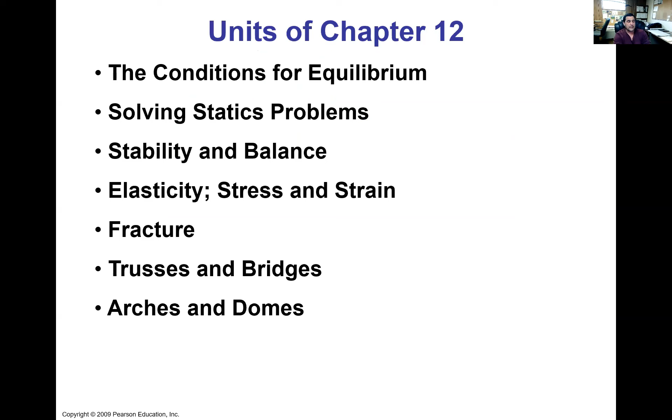So we're going to talk about what the conditions for equilibrium are. We're going to do some problem solving with statics. Then we're going to talk about stability and balance, elasticity, stress and strain, fracture, and the last two sections on trusses and bridges and arches and domes, I'm going to gloss over pretty quickly. If you're going to be taking an engineering degree, I'd recommend looking it over, but it's not going to be on the test.

So what are the conditions for equilibrium? For something not to move, the first condition of equilibrium is that your sum of forces in the x direction, the y direction, and the z direction - the sum of all the forces needs to be zero. So an object with forces acting on it, but with zero net force, is said to be in equilibrium.

So a book sitting on a desk is exerting its weight on the desk, but the equal and opposite force to that is the normal force.

Let's do an example here. One of the things we're going to talk about as we go with these problems is reaction forces. We're not really looking at, in this example, the reaction force of the cord at the wall, but we will get into that in a little bit.

So what we're looking at here is the tensions in these cords. They want us to calculate the tension in cord A and cord B, so they're calling it FA for force A and FB for force B, that are connected to the vertical cord supporting a 200 kilogram chandelier. So now kilograms of mass, okay? We're also going to ignore the mass of these cords. They've already converted this 200 kilogram force for us into 1,960 newtons. They've also given us a picture here about the X and Y components of this - opposite interior angles, this angle is 60 degrees. You can also say this angle is 30 degrees for us to determine whether we're dealing with sine or cosine.

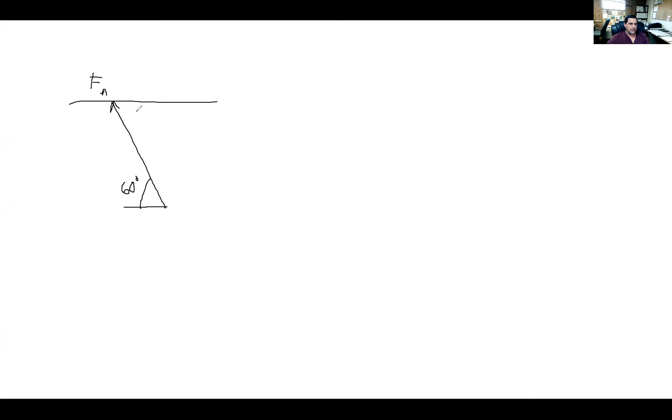You have this FA, and this angle here was the 60 degrees. In the picture, here was the ceiling and the 60 degrees was here, but same sort of thing. This FA - I want you to get into the habit of whenever you see a force that is not parallel to either the X or Y or Z, depending upon how many dimensions we're given, I want you to get into the habit of breaking this into an FAY component and an FAX component. So get in the habit of breaking these forces down.

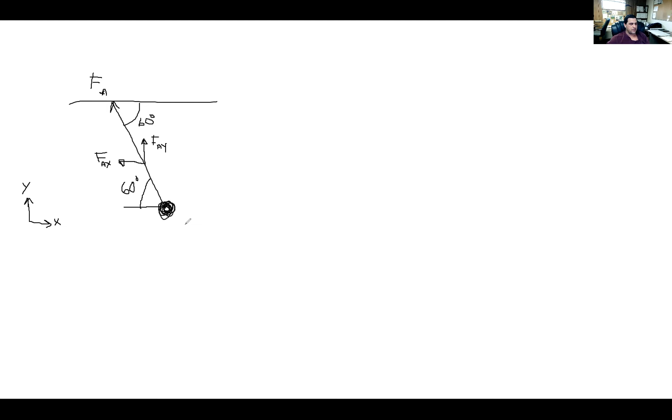Okay, so I'm not feeling artistic tonight. I'm just going to draw a big circle here and say this is my chandelier. And weight is equal to mass times gravity. We're given a mass of 200 kilograms. If you take your 200 kilograms and multiply it by 9.8, so here's your mass, the weight of this chandelier is 1,960 newtons.

But then we also have this FB, but FB is just in the X direction - there is no Y component to it. So it doesn't matter what order you work in. You can sum forces in the X first, or you can sum forces in the Y.

If you have too many unknowns, try and solve for the other one. So previously what we did was sum of forces is equal to mass times acceleration. But we don't want anything to move in statics, so your sum of forces is going to be equal to 0. So I'm going to do the Y direction first.

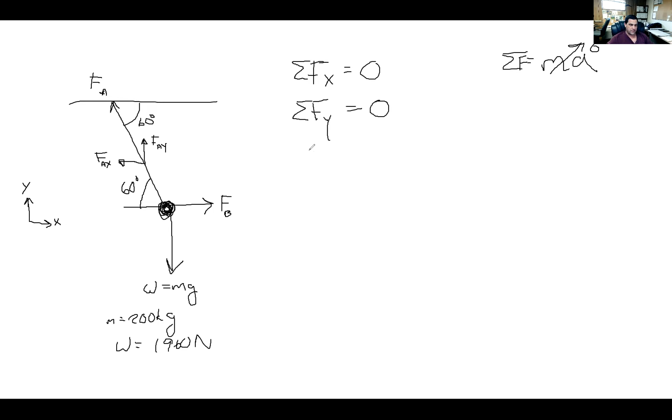And I'm going to break this FA force into its Y component. So its Y component would be the sine of the angle that we're given. So it would be FA times sine of 60 degrees. And as you can see, that's positive. So keep track of your signs.

Minus the weight of the chandelier, either the 200 kilograms times gravity, or 1960 newtons, is equal to 0.

And I've got my free body diagram here. Always get in the habit of drawing your free body diagram. You're accounting for all the forces acting on an object. On a test, I'm going to give you some sort of points if you at least give me a free body diagram.

So if we want to solve for FA, FA is 1960 newtons divided by sine of 60 degrees. So FA is equal to 2,260 newtons.

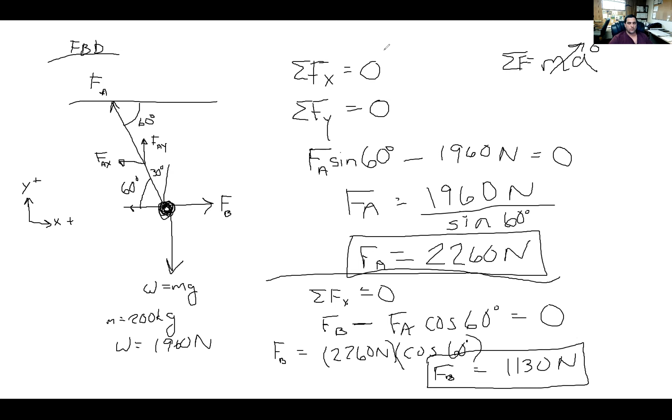So if you end up with too many unknowns, switch to the other direction and see if you can solve it that way. Okay? I'm going to stop sharing this. I'm going to go back over to PowerPoint. So we just solved for those two tensions in those two cords.

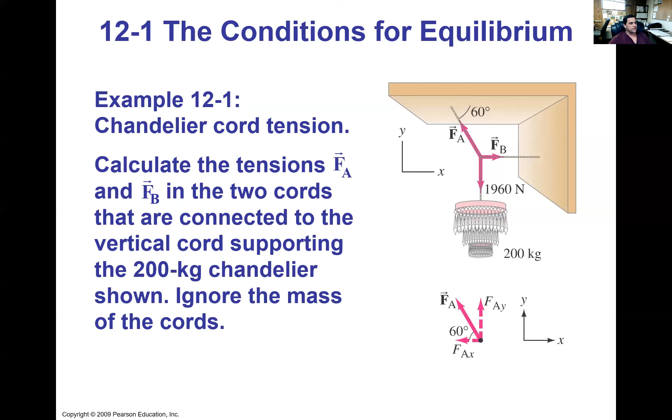The second condition for equilibrium has to do with the subject we started talking about in the last chapter, and that is torques. Now, when you get to statics, a lot of statics texts will refer to torques as moments. This text continues to refer to them as torques. So the second condition of equilibrium is that there can be no torque about any axis. Whatever axis that is can be completely arbitrary. So the sum of torques has to be equal to 0. There can't be any rotation for this either. So sum of torques has to be equal to 0 also.

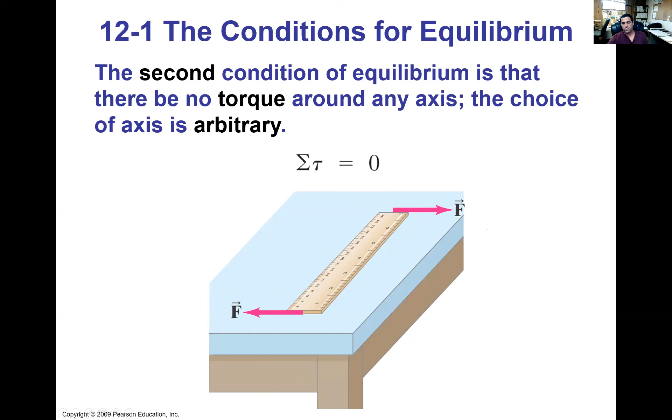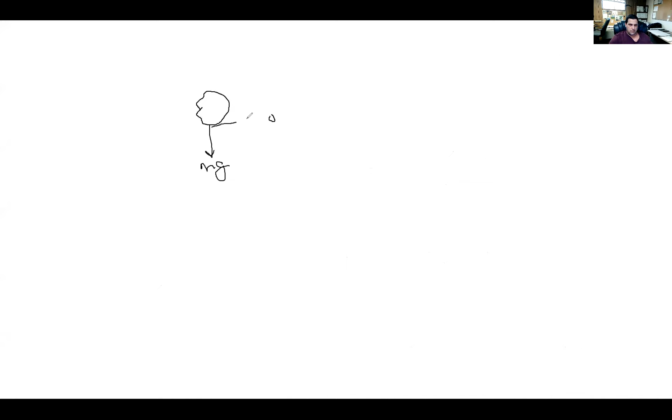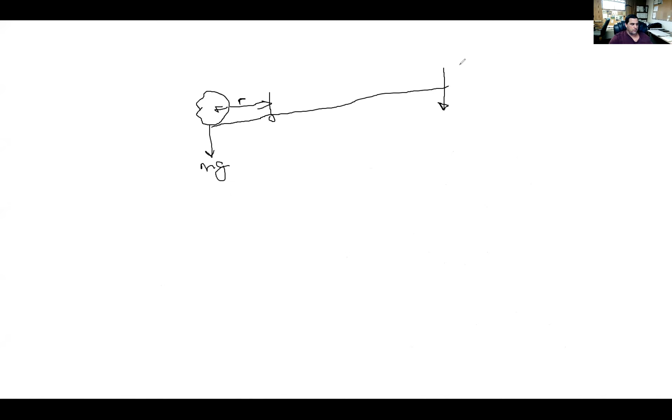So if you look at the picture we had, you have this rock, and the rock has a mass times gravity, and you had this smaller rock and a lever arm. This distance is a small r, and the person is pushing down with some pushing force here, and this dimension is your lever arm.

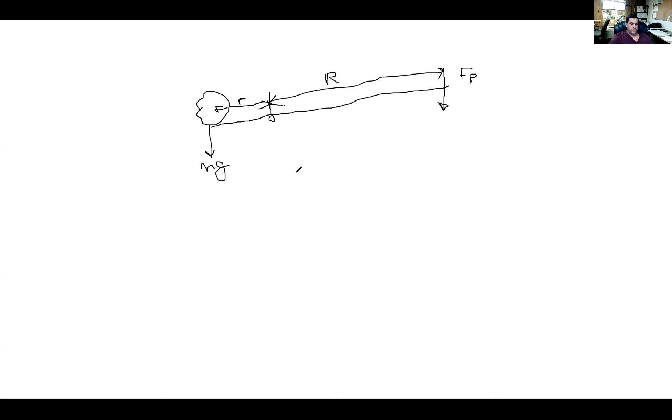Sum of torques needs to be 0. So you have a torque here and a torque here about this small fulcrum.

We need to, at some point with torques, assign a positive and negative sign. So in most statics classes, counterclockwise is positive.

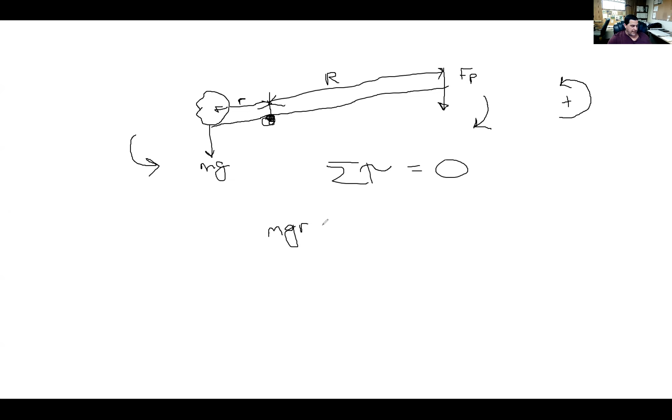So this first, the large rock, is mass times gravity times this little lever arm here. That's going to be positive because about this point, it's going to want to rotate counterclockwise. This one is going to be negative. So you have this pushing force times that larger lever arm, equal to 0.

So you can see that to move this, because I'm just moving this over to the other side, I can either increase my pushing force or I can increase the radius.

If I were to take that smaller lever arm and divide it by the larger lever arm, so if I bring that over, I'm taking that pushing force and dividing it by whatever I'm trying to move. So this is the ratio of my levers. This is something called mechanical advantage.

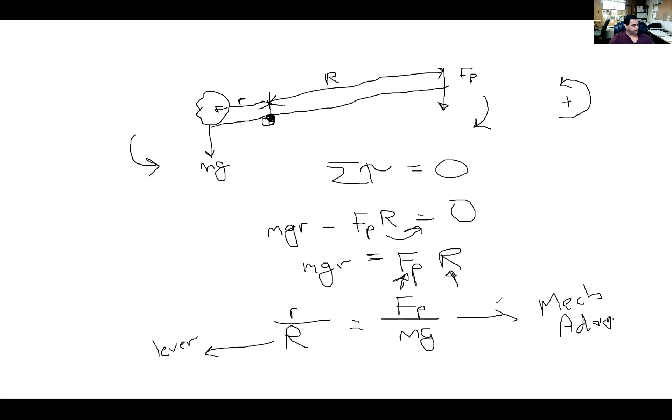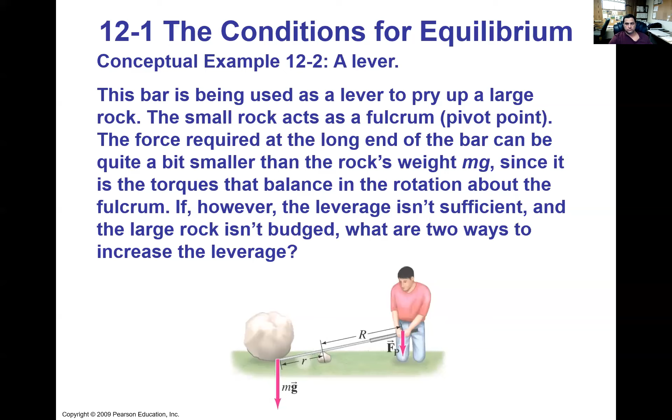So how do you solve problems in statics? Well, statics problems are something that you have to get practice at. There's just no two ways about it. You need to do a bunch of them. It's like the first time you started doing derivatives and integrals. You just have to do the drill work and practice.

So choose one object at a time. Draw its free body diagram. What are the forces acting on it? Make sure you account for all those forces.

Choose a coordinate system and resolve the forces into components. So anything going to the left should be negative, to the right's positive, up is positive, down is negative. And your torques, counterclockwise is typically positive. So then write your equations of equilibrium: sum of the forces in x, y, and z all equal to 0, and sum of torques around any axis, around any point, equal to 0.

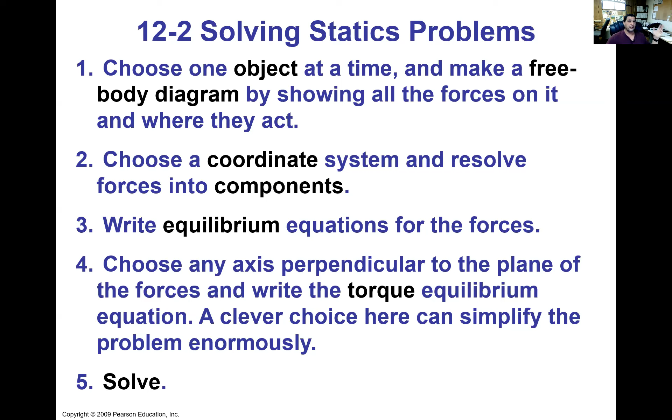If you choose the spot where you sum the torques about, you're going to simplify the problem, because if you pick a spot where the lever arms are 0, you're going to get rid of a lot of unknowns, and then you solve the problem. So we'll get into being clever about where you sum moments or torques about so that you can have those torques cancel or the lever arm be 0 and you don't have to account for them.

So here's an example: you have a board that has a mass of 2 kilograms. We're assuming the board has a uniform density, so that force is going to act in the center of that board. The mass of the board's 2 kilograms, and it's a seesaw for 2 children.

Child A on the left-hand side has a mass of 30 kilograms, sits 2.5 meters from the pivot point, P. At what distance X from the pivot point must the other child, who has a mass of 25 kilograms, place herself to balance the seesaw?

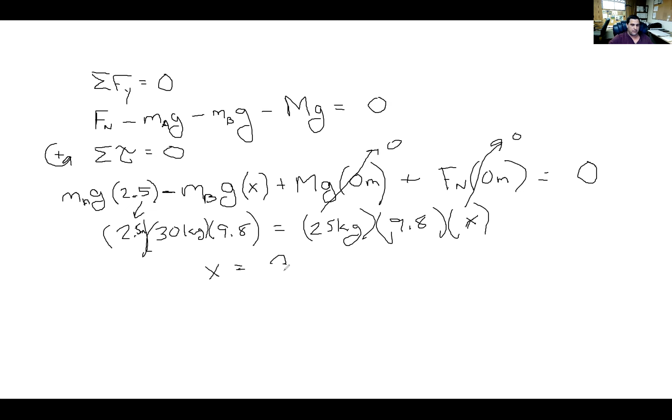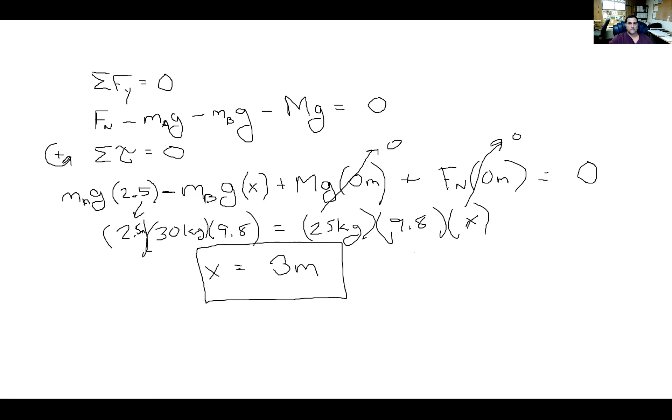Now I could have summed my torques about either child A or child B or some point along here, but what you'll quickly see is I won't know where that center of the beam is relative to, because this is 3 meters. I assumed my rotation about this point, so those two lever arms canceled. If I pick another point, that might not be the case.

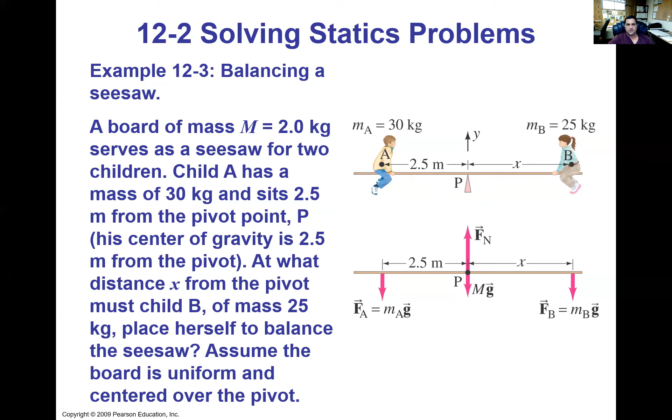So if a force in your solution comes out negative... FA here, we're saying is positive. But if you were to solve this through with sum of torques and everything, and FA turns out to be a negative solution, if you're accounting for it in the problem as being positive and upward, if you get a negative answer that just means it's going in the opposite direction. If you assume it's going downward and you get a negative answer, then it's going upward. So it just means it's in the opposite direction of what you chose. Don't worry about getting all of the signs right in your assumption, it will work out in the math.

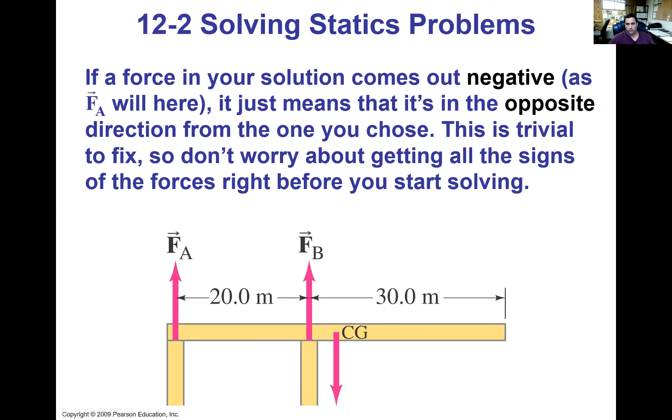So the force exerted by a bicep. How much force must a bicep muscle exert on a 5 kilogram ball held in your hand, first with the arm held horizontally, and then when the arm is at a 45-degree angle. The bicep muscle is connected to the forearm by a tendon attached 5 centimeters from the elbow joint. Assume that the mass of the forearm and the hand together are 2 kilograms and their center of gravity is shown. They gave us the center of gravity being 15 centimeters over. They gave us that this bicep force, the muscle force, is 5 centimeters over from this joint. And they gave us that this 5 kilogram ball is 35 centimeters out.

Now, again, where you sum your torques about in this example could help you depending upon where you choose to sum the torques. I'm going to sum torques about this point right here, FJ. So I'm not going to redraw the free body diagram, you can refer back to the picture. But I am going to sum torques, assuming counterclockwise positive, and I am going to do it about FJ, which is the force at the elbow joint.

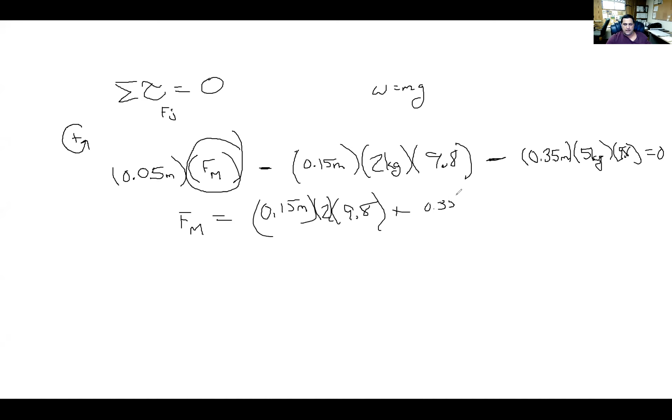And I'm moving this over to the other side, plus 0.35 times 5 times 9.8. Divide that whole thing by your 0.05 meters to get FM.

You would need to exert a 400 Newton force in your bicep to be able to support your hand, forearm, and a 5 kilogram ball.

So given this situation, they asked us, what if the arm is at 45 degrees? So this is part A. Okay, so 400 Newton force. Stop sharing that. Let's go back to the PowerPoint.

So here's my arm and free body diagram. So it's already here for us. The second part, what about when the arm is at 45 degrees? Well, you're going to end up with the same torques, right? You see how the distances aren't really changing? So in this situation, the same torque equation is going to give you the same 400 Newton force. It's not going to change.

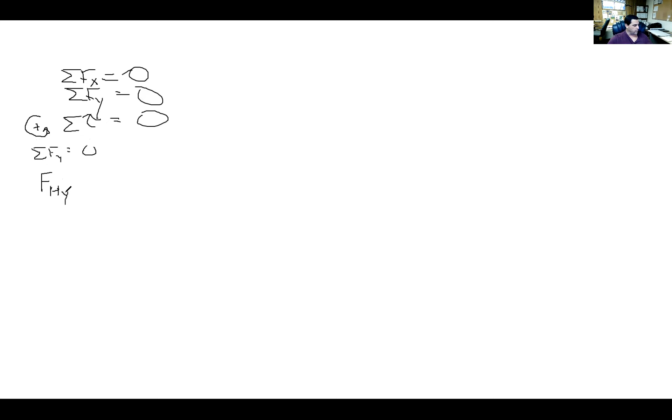So we can sum forces in the y direction equals 0. We have the reaction force for the hinge in the y. We have the tension in that cable, which is also going to have a y component. We have the mass times gravity—this lowercase m is for the beam. And then we also have the mass times gravity for the sign, which is the larger uppercase M.

Now, if we look at this, too many unknowns, right? We have the mass of the sign, the mass of the beam, we know gravity, but we don't know the reaction force in the y for the hinge or the reaction force for the cable.

Well, that's okay. Let's take a look at sum of forces in the x equals 0. So in the x, we have the positive FHX, and we have the negative tension in the cable, and that's going to be equal to 0. Well, that makes sense, equal and opposite, right? Okay, but it still doesn't help us because we don't know either of those.

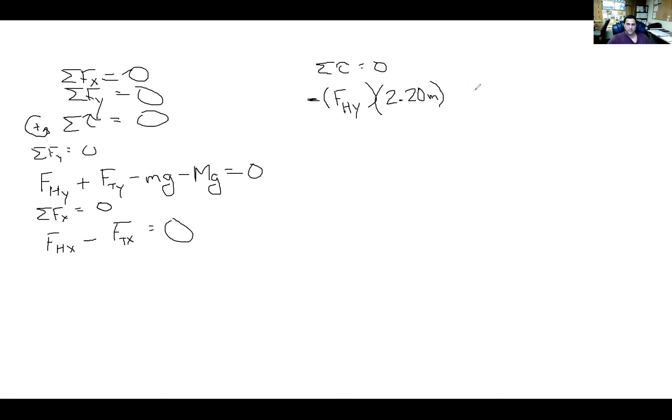And then the next thing I'm going to have is the weight of the beam, which is the lowercase m times gravity, and that is 1.10 meters away. If we go back and look at that, that is going to create a counterclockwise rotation because we're assuming the weight is acting down. So it's going to want to rotate counterclockwise, so that sign is positive.

Now, out at the end of the beam, we have our tension in the y in the cable, our tension in the x in the cable. We have the weight of the sign in the y. But if you look, all of those lever arm distances are zeros. So there is going to be no torque because all of those distances are zeros. Those forces are there, but they're not going to generate a torque. So those are the only two torque generating forces in this problem.

So that helps because now we can just solve for FHY. If I solve for FHY, I get 1.1 times the mass of the beam, which they gave us was 25 kilograms, times 9.8, and that whole thing is divided by 2.20. So FHY is 123 newtons. That's my reaction force in the Y direction, 123 newtons.

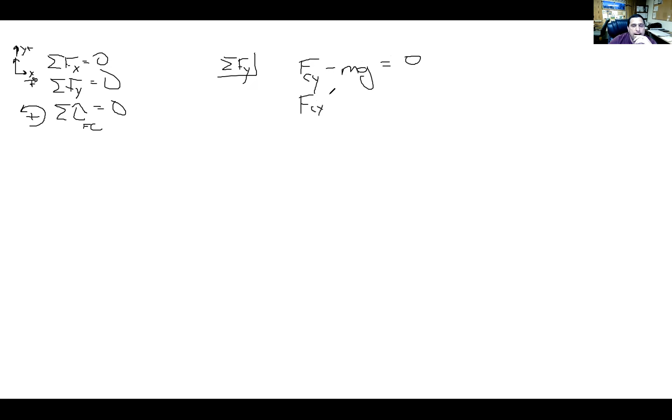So FCY is equal to 12 kilograms times gravity, 9.8 meters per second squared. So FCY is equal to 117.6 newtons.

If we sum forces in the X, I would have my reaction force for C in the X. The weight of the ladder doesn't act at all, so that's equal to the reaction, and you have the negative reaction force at the wall. So that makes sense, they're equal and opposite.

Now, if I sum torques about point FC, counterclockwise is positive. So I have the reaction force at the wall, which is at 4 meters, times the reaction force at the wall, FW.

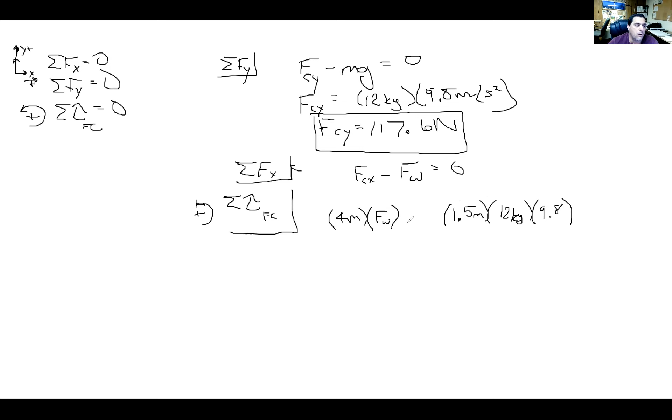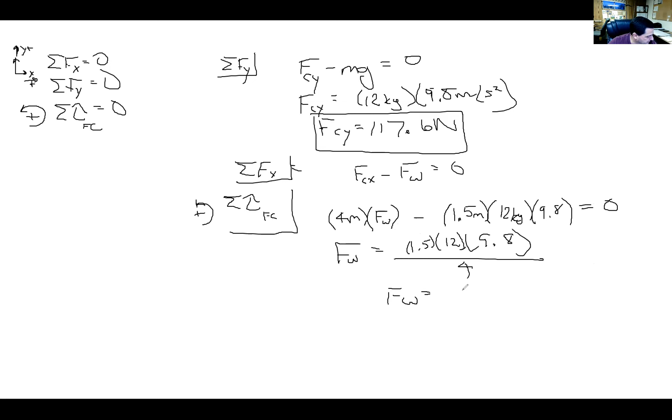So if we solve this for FW, it'd be 1.5 times 12 times 9.8 divided by 4. So FW is 44 newtons.

We see that from this, reaction force C in the X is also going to be 44 newtons, equal and opposite. I could resolve this into one force, but the Fx is the only one you'd be worried about for calculating your friction. All I would have to do really at that point is give you the coefficient of friction, right? You have your 44 newtons in the X, which is the reaction force there.

44 squared plus 117.6 squared. FC is 126 newtons.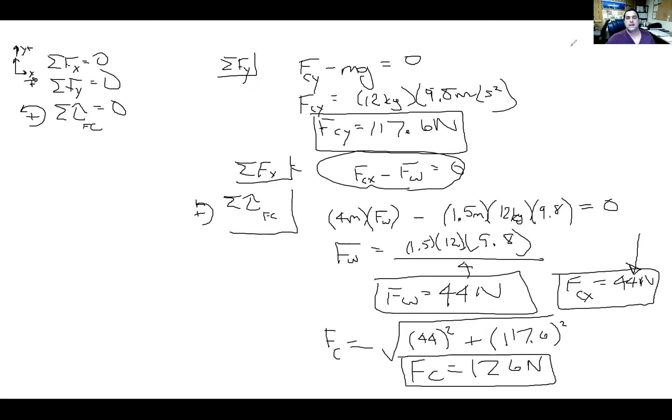Let's take a look at the next topic. So before we move off of solving problems, do some of the textbook problems and get used to trying to find the most convenient spot to sum torques to simplify the problem so that the lever arms are zero.

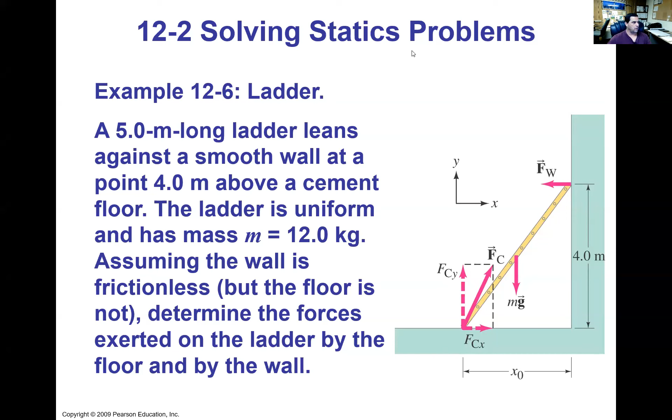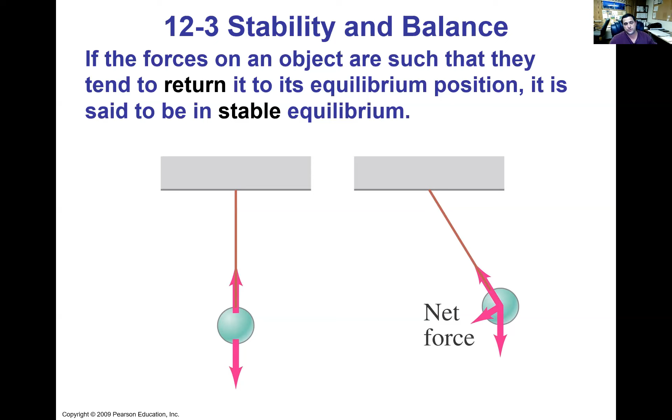Stability and balance. If you have a force on an object such that they return it to its original equilibrium position, it is said to be in stable equilibrium. So if you have a pendulum or a ball hanging from the ceiling and you move it and it has a tendency to want to go back to its original position, that's considered stable equilibrium.

If, however, it tends to move away from the equilibrium point, it will find another equilibrium point, like in the case of this pencil. So if something tends to move away from its equilibrium point, because obviously a pencil is not going to balance on its tip, in that case it's said to be an unstable equilibrium. But what's going to happen is the pencil will fall to the desk or the floor, and it will remain in a new position. It'll remain horizontal. That new position is now considered to be neutral equilibrium, okay?

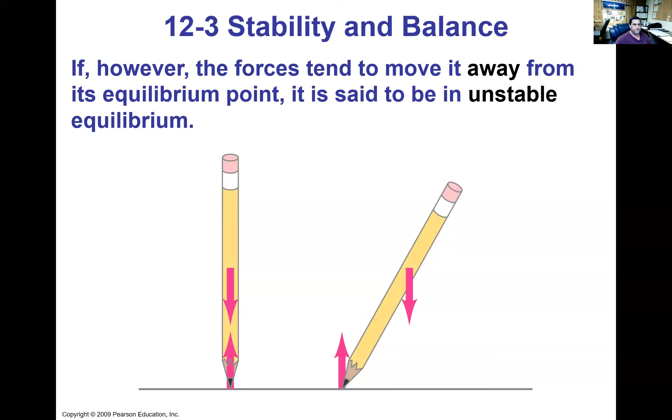If we take a look at an object in stable equilibrium, you can tip it and get it into a situation where it is in unstable equilibrium. That happens when the center of gravity is tipped outside of the point that you're pivoting around or rotating about. It will be stable again after it lands, and then it'll be a neutral equilibrium, like we said.

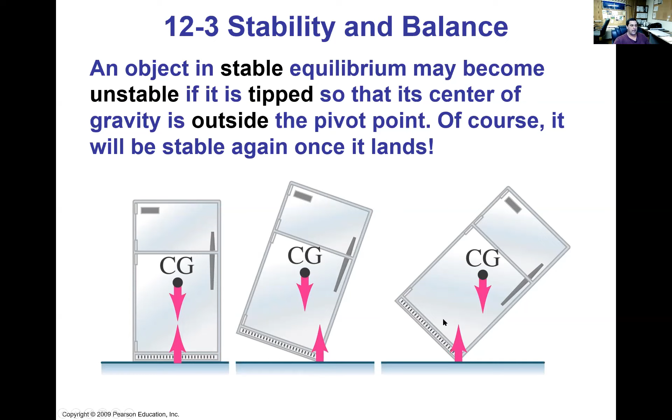But as you can see, if I move this refrigerator, as long as I'm rotating it about this lower right corner, as long as that center of gravity is kept to the left side of that pivot point, it'll have a tendency to want to upright itself. As soon as that center of gravity moves just beyond that pivot point, now it wants to rotate the other direction.

So people carrying a heavy backpack or something tend to adjust their posture over their feet, and this can lead to injuries, of course, but what you're trying to do is get the weight over your center of gravity.

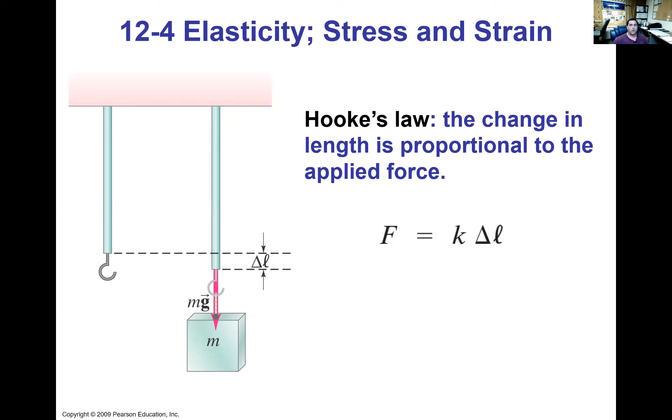Okay, so now we're going to talk about elasticity, stress, and strain. So Hooke's law is a pretty simple equation. It basically says that the change in length is proportional to the force applied. So the more weight that I put on this hook, the more that rod hanging down from the ceiling is going to want to elongate. This proportionality holds true up to a certain point, and that point is called the proportional limit.

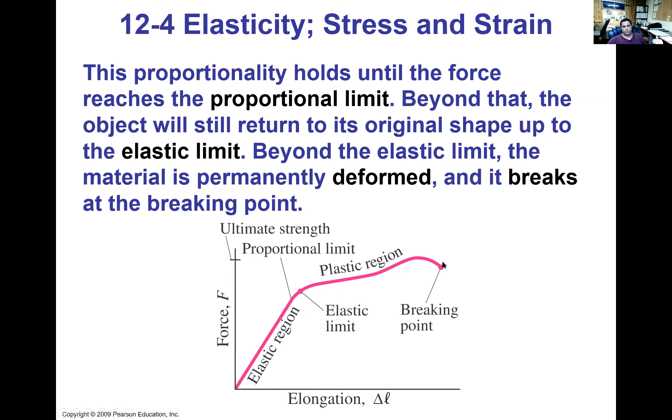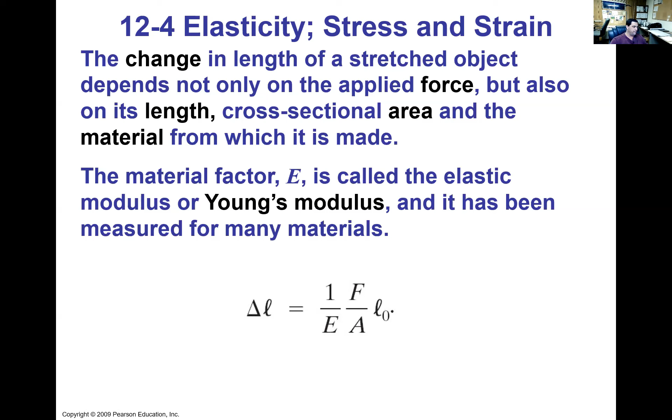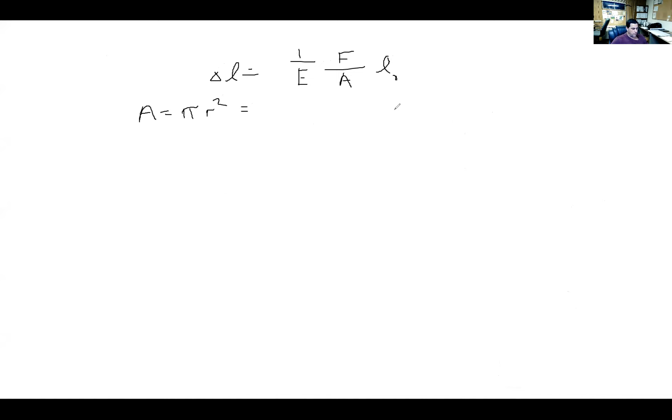So this is really just using that algebraic equation. Change in length equals 1 over Young's modulus, times force over area, times L sub 0. So the area of this, it's a circle, so it's pi r squared or pi d squared over 4. The radius, if it's 0.2 centimeters in diameter, is a 0.1 centimeter radius, which is 0.0010 meters.

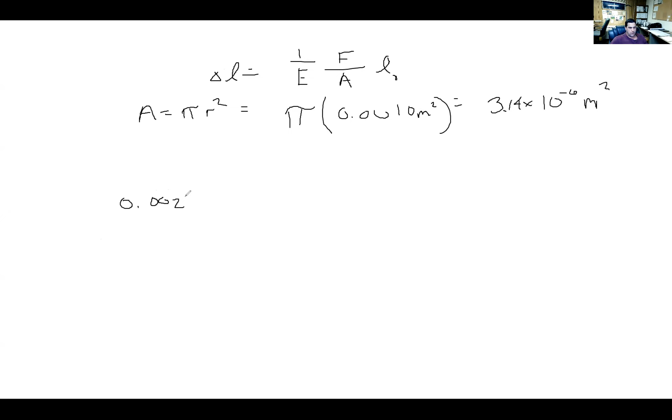So if you look at the units for that modulus, if you flip back and take a look at it, it's Newton per meter squared. So you want to be working in units of meters and newtons. 10 to the minus 6 meters squared, so that's my area for up there. So my change in length, they gave us, it stretches 0.25 centimeters, which is 0.0025 meters. So be careful you're working in the right units.

The steel piano wire is 2 times 10 to the 11th Newton per meter squared. The force applied is what we want to figure out. The cross-sectional area we just did up top here, 3.14 times 10 to the minus 6 meters squared. The original length is the 1.6 meters, which was given in the problem. And if you solve this for F, you get a little less than 1,000 newtons, 980 newtons. So it's really just taking a look and being mindful of what your units are and looking up that value in a table.

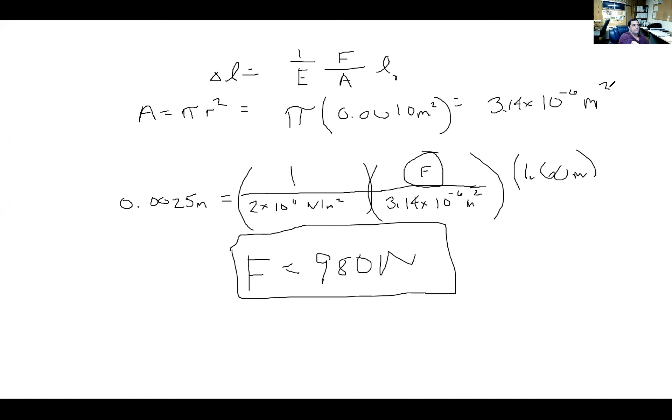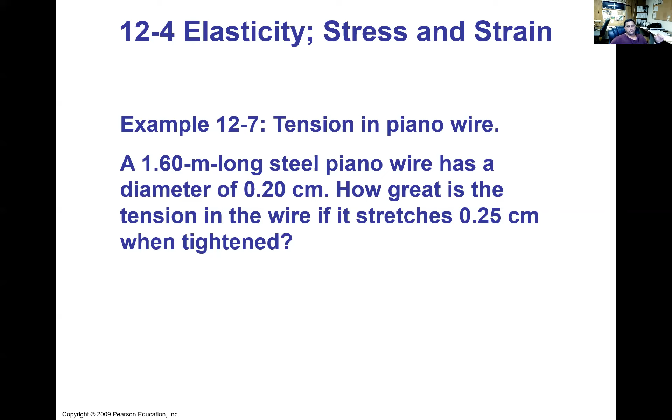So elasticity, stress, and strain. Stress is defined as force per unit area. Stress is force over area, pounds per square inch. Okay, stress. Strain is defined as the ratio of the change in length to the original length. So if you rearrange that elastic modulus equation, elastic modulus is F over A, or change in length over original length, divided by each other. E, that elastic modulus, is just stress divided by strain.

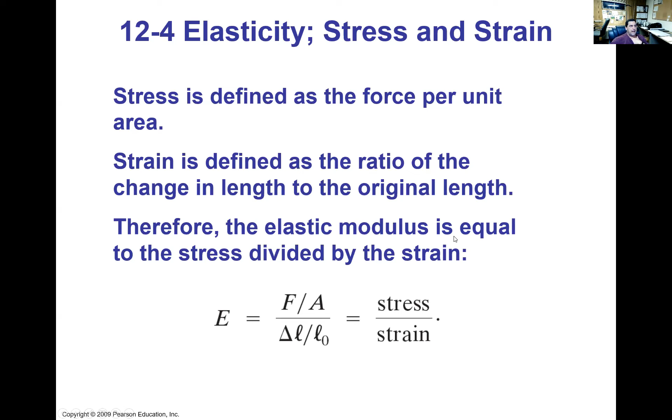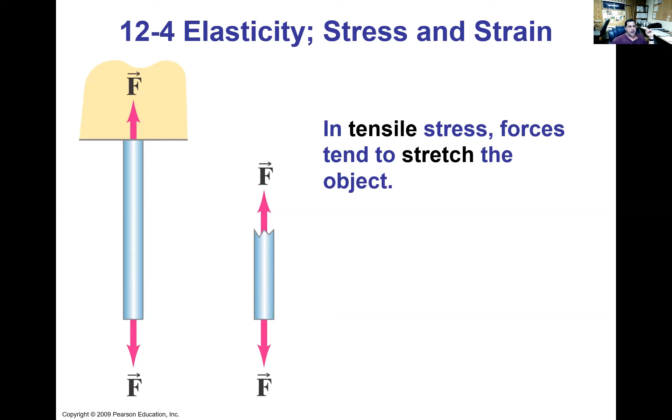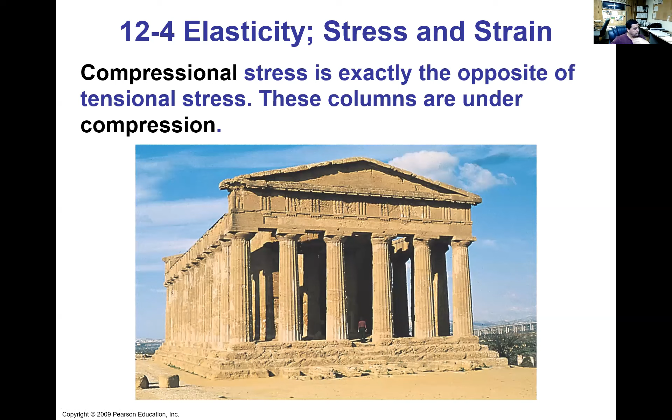So there are different forces objects can encounter. You have tension, compression, and shear are the most common. There's others, but the most common you're going to find are tension, compression, and shear. So tension is where you pull on the two ends of something and try and stretch it or elongate it out. Tensile stresses, the forces tend to stretch an object. Compressional stress is the opposite, and it's the exact opposite of tension. You're squeezing something together. Okay, compression is squeezing together. Okay, like these columns here are under compression.

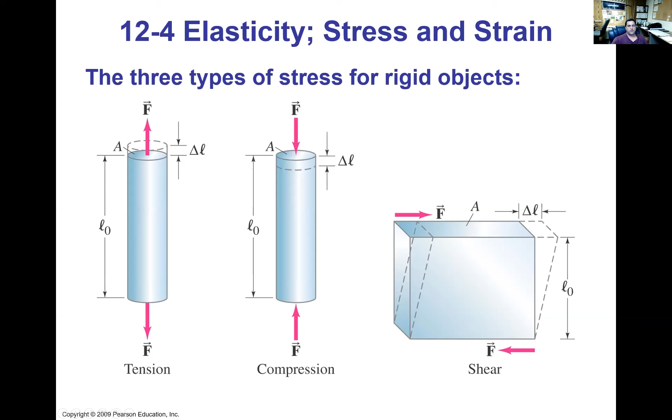So here are the three different types that we just talked about. You have tension, compression, and shear. Now, shear is where you apply two forces that oppose one another, and you're trying to get this type of effect happening. Okay. Shear strain, notice it's basically the same exact equation, but you have a G value, which is your shear modulus. So back in that table, notice you have a shear modulus column, and you also have a bulk modulus column, but it's nearly the identical equation, right? But this is your shear modulus, okay?

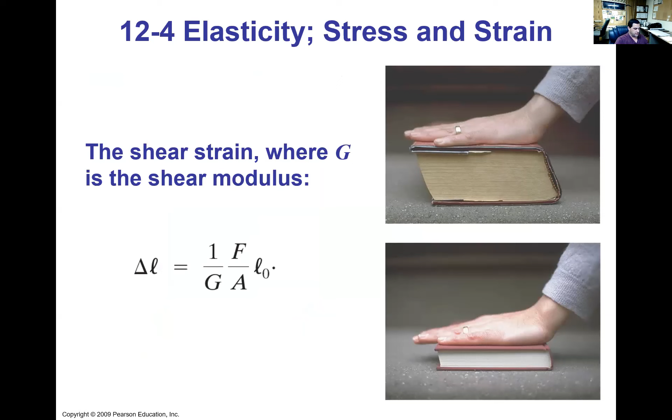And then the last one, notice that they gave us values for liquids and gases, but they didn't report shear modulus. They didn't report Young's modulus for liquids and gases. Well, that's because the bulk modulus deals with the liquids and gases. You can also have Young's, shear, and bulk for some solids, okay?

So if an object is subjected to inward forces on all sides, its volume will change depending upon its bulk modulus. So this is change in volume with respect to original volume. So this really only applies to fluids, where fluids are either liquids or gases, okay? So delta V is change in volume, V sub 0 or V naught is original volume, B is your bulk modulus, delta P is the change in pressure or stress or force per unit area. So if it's a negative sign, volume decreases as pressure increases, right? So this negative sign here, volume decreases, pressure increases, and vice versa.

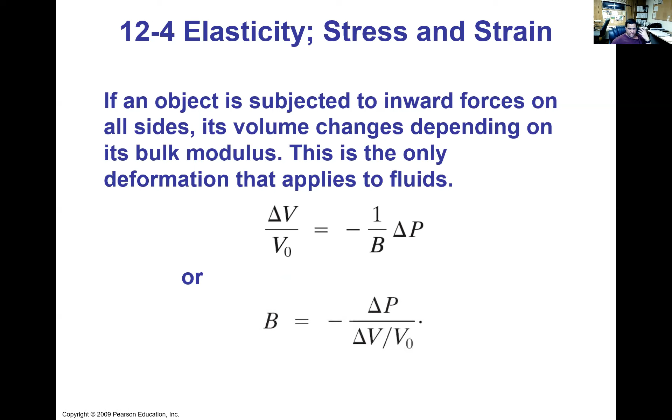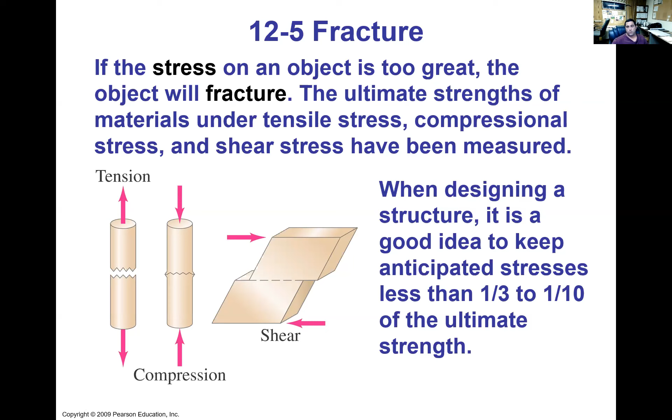So if the stress of an object is so great that it breaks, that's called fracture. Ultimate strengths of different materials under tensile stress, compressional stress, and shear stress have all been measured. In engineering, most of the time you do not design something right up to its ultimate strength. You usually keep a third, a half, a tenth — that's called a factor of safety. You don't design right up to it because you don't want it to fail. So these are your ultimate strengths for different types of materials.

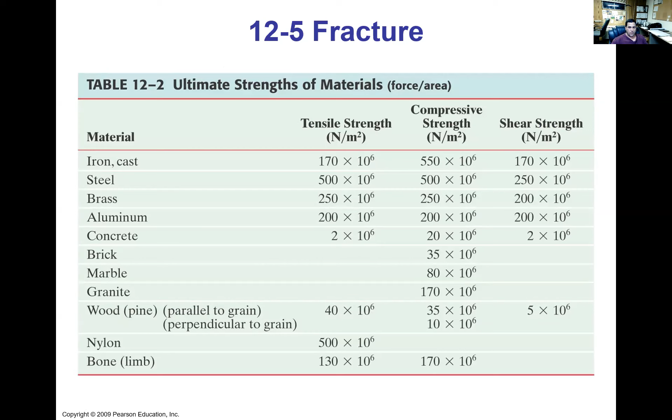On a test, this would be given to you. So if we want to use this in a problem, let's look at the same piano wire: it's 1.6 meters long, diameter of 0.2 centimeters. What tension force would break it? I'm going to stop sharing and go to a whiteboard. So what force would break it?

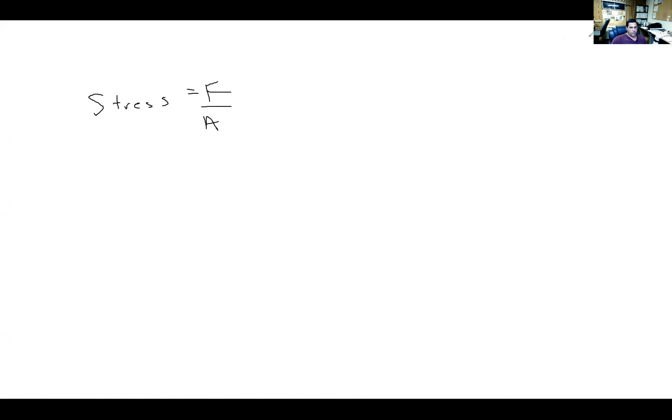We have stress equals F over A. We know the cross-sectional area from before — we did this before, but just to quickly review, pi r squared. The diameter was 0.2, so the radius is 0.1. From the previous table, steel fractures in tension at 500 times 10 to the 6th Newtons per meter squared.

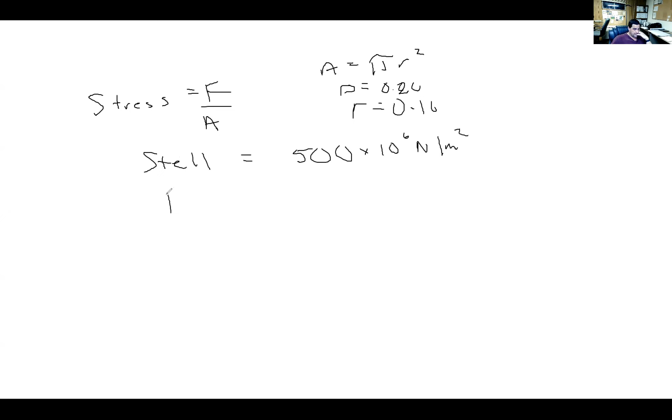Rearranging this, force equals stress times area. If it breaks at 500 times 10 to the 6 Newtons per meter squared, times 3.14 times 10 to the minus sixth meters squared, you would have to apply 1,600 newtons of force to break that piano wire.

Now, in the practical real world, you wouldn't want to put that piano wire in a situation where it was taking any more than, let's say, 800 newtons of force. The reason for that is factor of safety — you do not want to put it in a situation where you're designing right up to the breaking point of whatever it is.

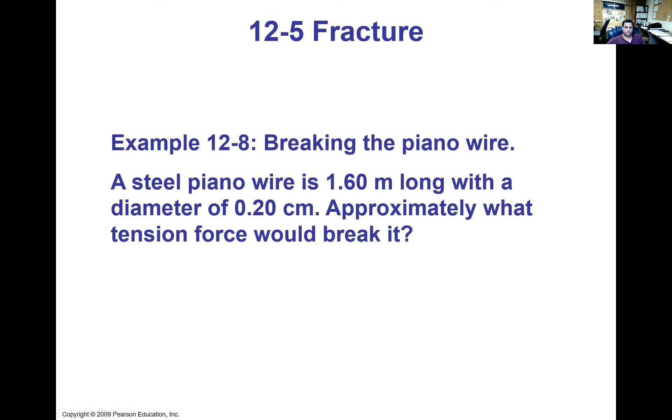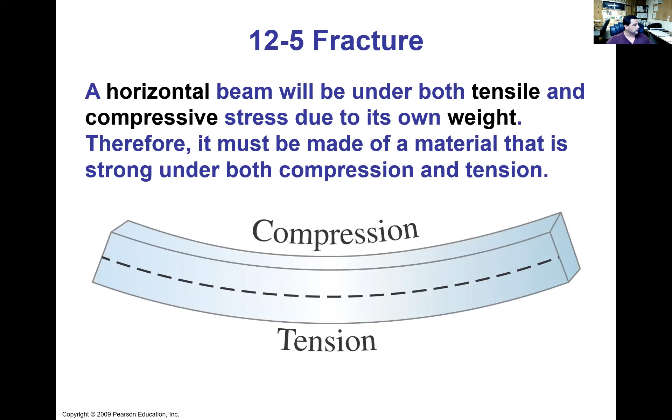One of the other things we want to talk about is this horizontal beam. This horizontal beam is actually experiencing something called shear. A horizontal beam on its top surface will be in compression, and on its bottom surface it will be in tension. So it's got to be made of a material that can handle both the tension and compression. There are shearing stresses occurring within this beam as a result of the tension and compression, subjecting the beam to torques and generating internal torques on the material it's made out of.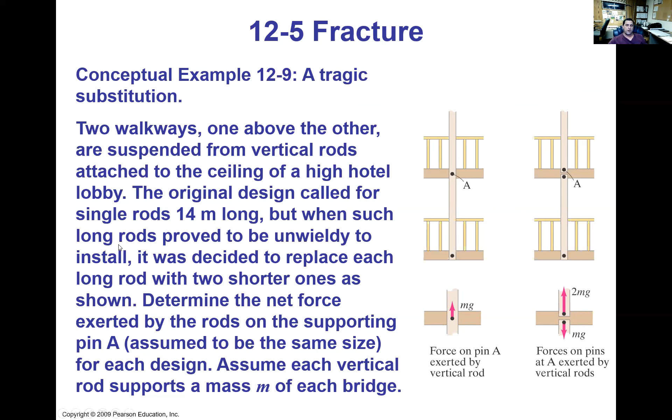I want you guys to research this on your own, and if you send me a summary of what's going on, I'll give you credit — I'm not going to go through it myself. In the late 70s, early 80s, there was a collapse in Kansas City at the Hyatt Regency. It was a hotel during its grand opening. There are two good videos online explaining what happened and how something that looked like a simple substitution was not at all simple — it happened during construction. I'd like you to research this, and I'll give extra credit points if you send me a quick email summarizing it. I'm not asking for a full book report, just want to see if you've looked into it yourself.

So, fracture on a beam. You have a pine beam that's 3.6 meters long, with cross-sectional dimensions of 9.5 centimeters by 14 centimeters. It rests on two supports at its ends, and the beam has a mass of 25 kilograms. There are two vertical roof supports resting on it, each one-third of the way in from the ends, with given dimensions. What maximum load, FL, can each roof support exert without shearing the pine beam at its supports? Basically, without breaking the pine beam, what can it support? They want us to use a factor of safety of 5.

Okay, so let's figure this out.

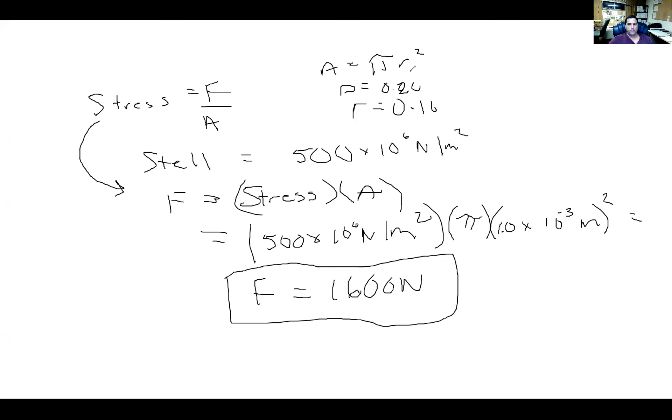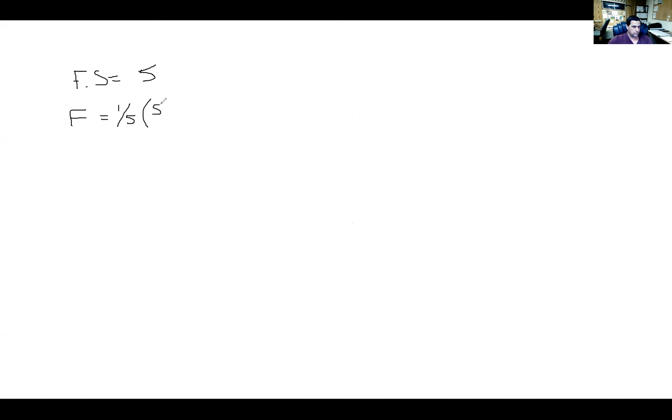So I'm going to reduce by 1/5 my stress times area. So it'll be 1/5. The pine can handle, and this is just a lookup from the table that I had, 5 times 10 to the 6th Newton per meter squared.

Now notice I'm dealing with meters and newtons. So if you're given masses, you have to convert them to kilograms, and then get them to forces in newtons. And if you're given centimeters, you have to convert those to meters. So if this thing is 9.5 centimeters, it's 0.095 meters. 14 centimeters is 0.14 meters.

So the force that we can apply up to 13,000 newtons. So now what I need to do is figure out what I can apply.

So I'm going to sum torques about some point, has to be equal to 0. You can pick which end of the beam you'd like. I'm going to choose the left edge of the beam. So I've got one of these roof supports, FL, that's 1.2 meters away, but that's going to create a clockwise rotation, so this has to be negative. Then I have the weight of the beam itself, the 25 kilograms times my 9.8, and that is halfway across, which is 1.8. That is also going to create a clockwise rotation, so this is negative.

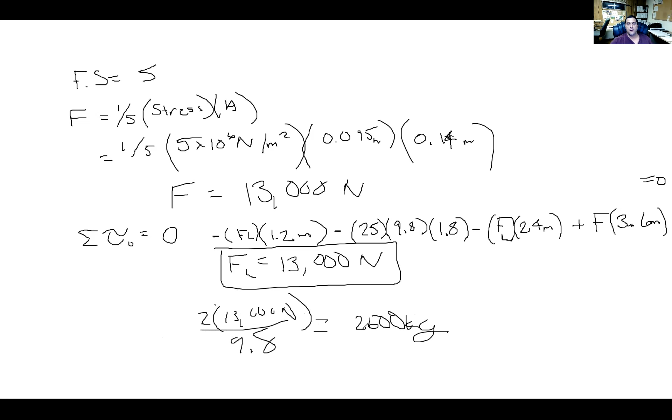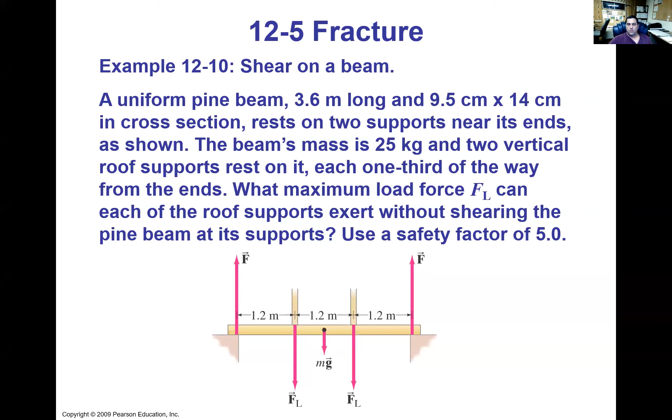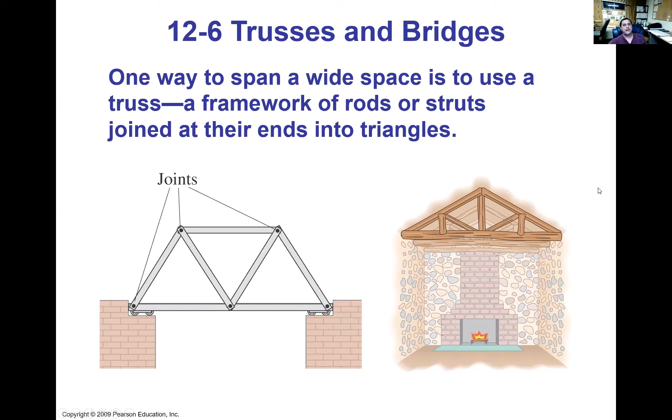So now the text goes into talking about trusses and bridges, all of which are very interesting. But these are sections in the text that are asterisked, so you are not required to know this material for the test, but it is a good preview of what you're going to see when you take a class in statics. So you're going to be dealing with roof trusses or bridge beam trusses and solving for each of the components of that truss, which are called members. So each member of the truss is either going to be in tension, compression, one or the other.

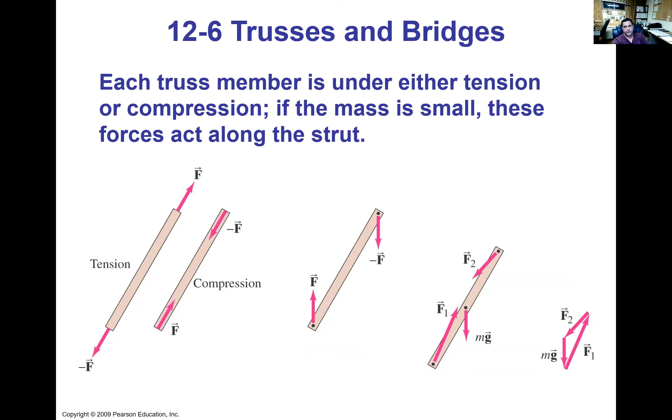You always assume that they're in tension, so you do all of your calculations assuming they're in tension, and if you get negative forces on any particular component, then you know it's in compression. Right, so you can go through and do free body diagrams and solve for each of the components of that using just simple equations of equilibrium. Sum of forces, sum of torques, all equal to 0. Do it at each of those pins, at each of those locations, and you can figure out what each of the components of that bridge are experiencing.

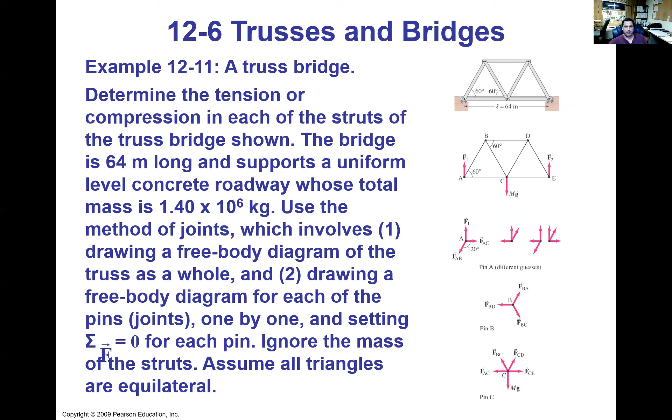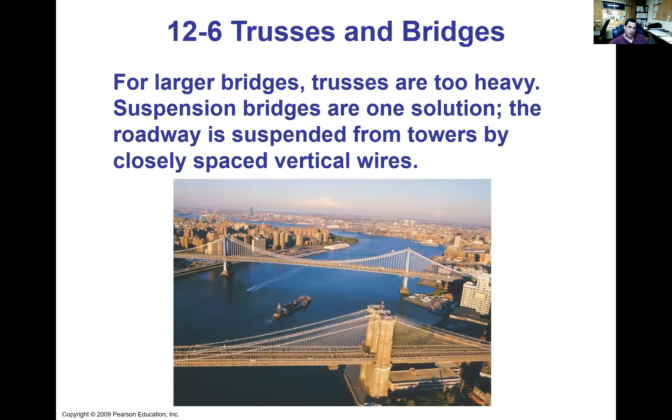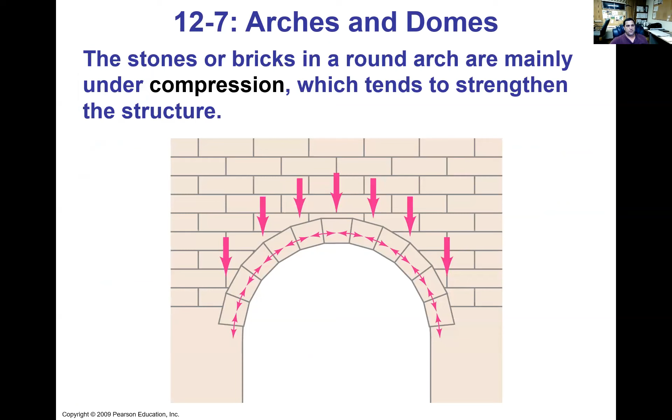Larger bridges, you have suspension bridges or arched bridges, arches and domes. Romans used the arches a long time ago because of the distances that they could span, right? The stones or brick are mainly under compression, which tends to make it a bit stronger. We started making things too big at one point, and they ended up using something called flying buttresses to help push back and counter some of the large forces that they were encountering.

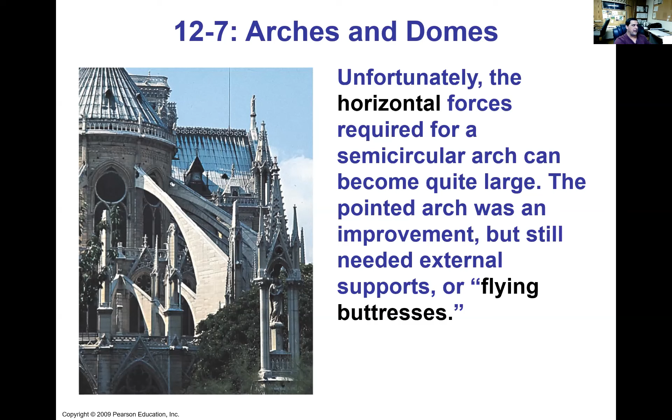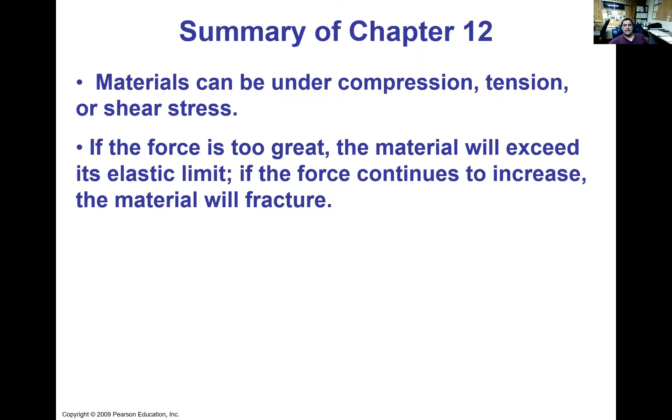So for an object at rest, it is said to be in equilibrium. The study of such objects is called statics. In order for an object to be in equilibrium, there must be no net force acting on it. There must also be no net torque about any axis. An object in static equilibrium can be stable, unstable, or neutral. Materials can be put under tension, compression, or shear forces. If the force is too great, the material will exceed its elastic limits and it will deform plastically. If you keep deforming it and you keep applying force, you could take the material to the point where it fractures or breaks. And that is the end of chapter 12.